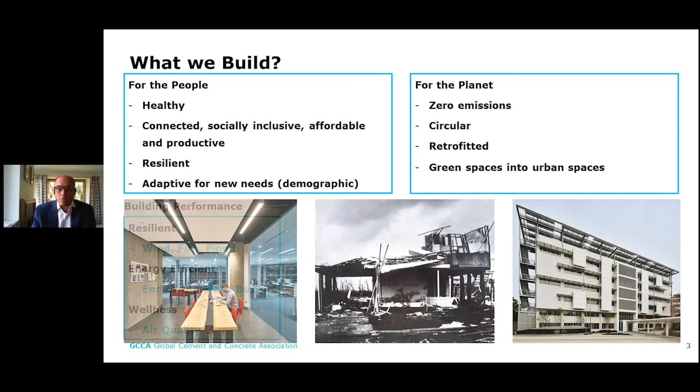So in terms of performance, what do we want our buildings to be able to do? It won't surprise you that on this list we have resilience almost up first - wind, fire, flood. We want them to be energy efficient, the end of the glass box. We know that construction through the last century and the beginning of this century, people like glass, but it heats up. Will we see the end of the glass box when it comes to architecture and wellness? A key part of wellness is the air quality of our cities.

We need to build in a way, both our buildings and our infrastructure, to respond to air quality. In terms of resilience, you can see in the middle an example - that was a cyclone in Australia, but obviously hurricanes in North America cause similar damage. We need to build against those.

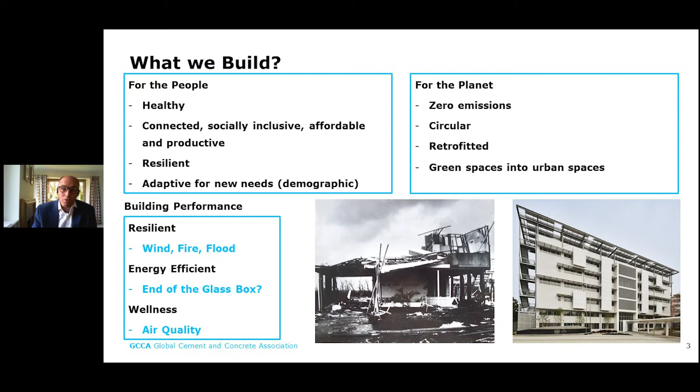And the disaster we had 3 years ago, the Grenfell Tower - this was a concrete frame building, and if it hadn't been concrete frame, it wouldn't have still stood after 24 hours of being completely burnt out. An absolute tragedy, which in a modern economy should not be allowed to happen. It has had serious ramifications in the UK construction sector, and I think it will be more broadly again. It's brought fire safety really to the forefront, in an area which had probably gotten complacent.

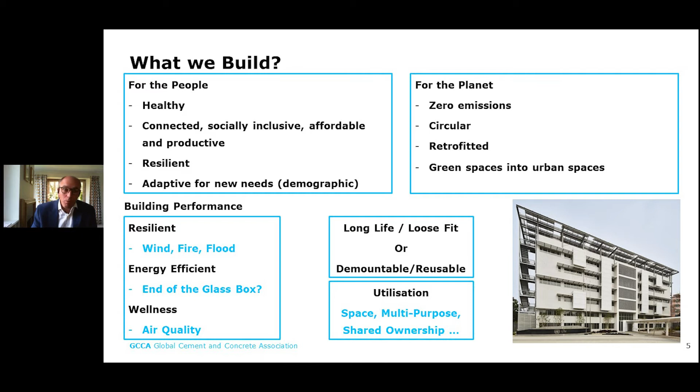So in the middle of the box, I've got some more here in terms of what we want from building performance: long life, loose fit. I'm a structural engineer, was with Arup for 10 years. The two choices: do you build buildings to last a long time, but be able to be flexible in their use? For example, the building on the right. So long life, loose fit, repurposing of structures is something we're very familiar with, probably in developed countries.

This example on the right-hand side is actually from Vietnam, the UN headquarters in Vietnam, which was a housing apartment block and was turned into their offices. An example of a concrete frame building, which because of the inherent resilience of it, can be repurposed.

The alternative to that would be demountable and reusable. If you've got a temporary stadium for an Olympics for 80,000, 100,000, maybe you want to reduce it down to 40,000. So you make parts of that demountable and reusable.

Great awareness currently in terms of the utilization of what we build. Are we using the space in the most appropriate way? Office space is being reevaluated post-COVID. The number of hours that the office is being used, even pre-COVID, was very small, and we need to consider how much we're going to be using that office space in the future and whether multi-purpose is an option.

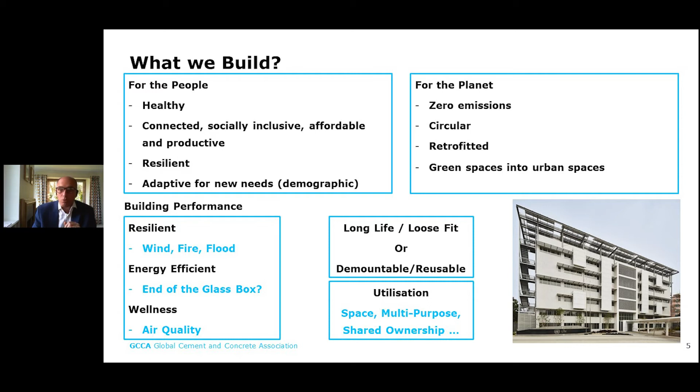Most of this has been about buildings, but we've also got, in our built environment and in our urban ecosystem, the infrastructure.

And will new transport change what our urban environment looks like? So much of it is determined by the car. Will that be how we plan our more sustainable built environment in the future?

We're going to have new energy sources, and therefore we've got the infrastructure around those new energy sources, and wellness again that I've already referred to. So what we build will be changing, and we need to consider what it is that we need as a society. How we build will also change. The first box here, the left-hand side, is new. The right-hand side, how we build, also needs to recognize the needs of the planet, those same four things.

How we build - productivity is a key thing for the construction sector. It's lagging behind in terms of productivity compared with other parts of the economy. Digitization is now coming in, but has been slow to be introduced into what is typically referred to - and I think it's true for most of the globe, you'll know better in your part of North America - a very fragmented industry that has scope for digitization to improve it, and business models to improve the productivity. And part of that, material efficiency.

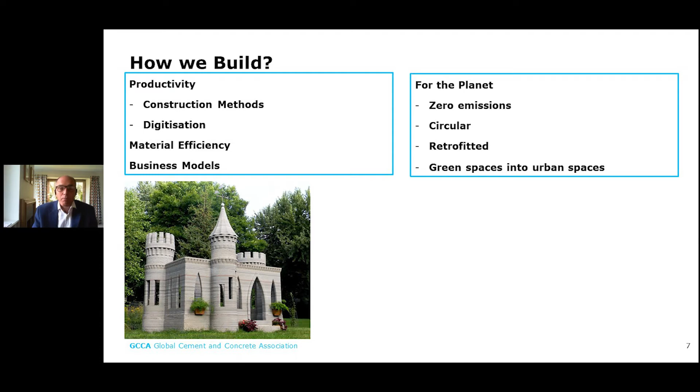So how are we going to build? 3D printing - it's just an example project on the left. No one's going to live in that, but 3D printing is coming in. Robots on construction sites laying concrete bricks, and off-site precast construction in a factory.

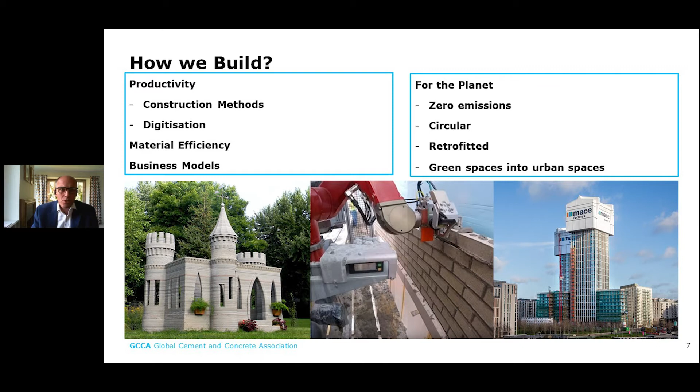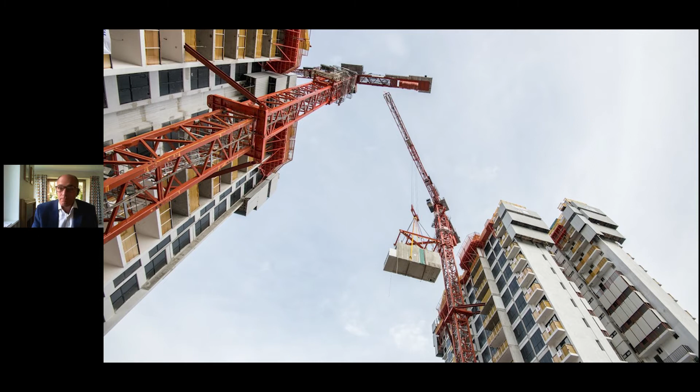So how we build is going to change, is changing. What are we going to build from? This report is from a little while ago, now, in 2017. Balfour Beatty, a major construction company in Europe, did a report on innovations to 2050. And what their crystal ball, what they saw, is the need for a new material which will work in harmony with the environment, have a lower carbon footprint, and is more durable, meaning less wastage. That's what we need for 2050, is that new material.

And it will address, for the planet, the same issues on the right-hand side. I would suggest that at the bottom there are 5 examples here, but there are more examples of what we need this material to be able to deliver. On the left-hand side we've got a sea defense, so it's coping - a material that can cope with aggressive environments. A material that's robust - the bottom left image, fire resistant.

And the images on the right, the first one is to do with acoustics. As we have a growing population globally, people need to live beside each other. Many of us are able to live in houses which are not in high density, but much of the world's population is living in very high density, and acoustic separation from neighbors is very important, as is thermal comfort on the far right-hand side. What will we build from?

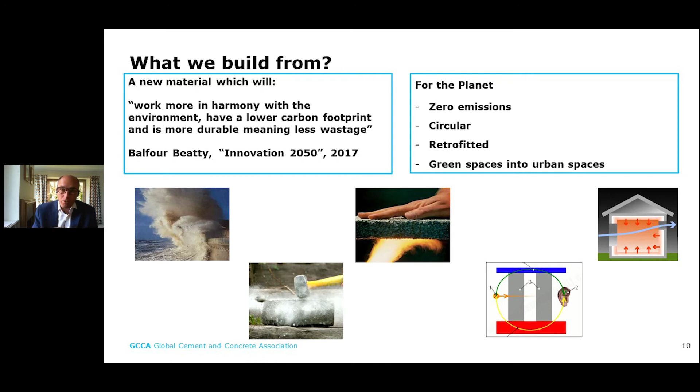We build from a material that can address a lot of these performance benefits, a material that needs to fit into the project life cycle and deliver the needs of those on the left-hand side who are designing, those who are building, those who are occupying in the first use of a project, the second use, and ideally can be recycled back to the beginning.

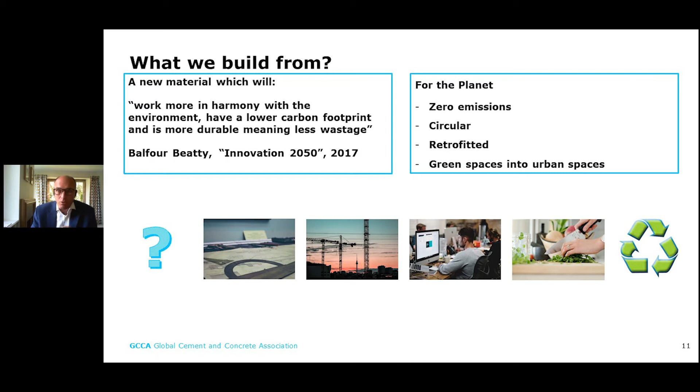So actually we live in a circular economy paradigm now. So let's put those things in a circular paradigm. And this new material, we want it to be supporting biodiversity, lowering the carbon footprint, zero waste, and delivering the needs as you go around this cycle.

So what do we want as a designer? As a structural engineer, I want a material that's got the properties I need, and it's got the product range. So the product range - concrete can come, materials can come in all sorts of ways, but we want a range of products that we can design with.

For the contractor in the construction, these are some of the parameters that might be useful. We've heard about 3D printing - can this material be used with 3D printing? Is it moldable? Can it be built in a modular way? Can it be used with other materials in a composite way? What is its performance? Can it then be demountable, adaptable, or long life loose fit? Is it fully reusable, this new material that we would wish to have?

In this circular paradigm, people often talk about circularity solving the issues. Globally, if we think about the metal sector, if 100% of metals are recycled, it will only satisfy 50% of society's demands for material. So we need additional material. We need to question where that additional material is coming from.

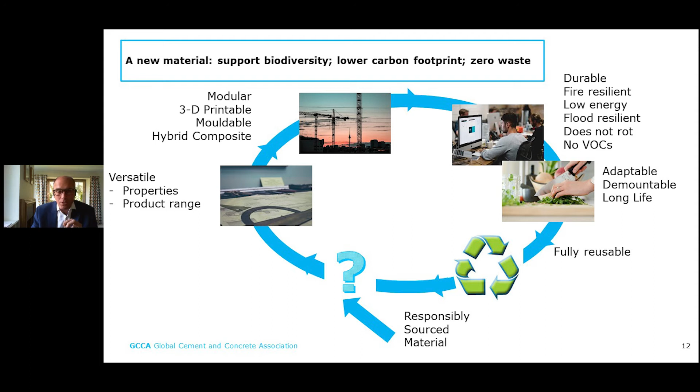I would suggest we want it to be responsibly sourced. What do I mean by that? It's going to have large reserves, because we need a lot of this to build what society needs as we try to deliver the UN Sustainable Development Goals, and serve society's needs in terms of resilience, for example, and housing.

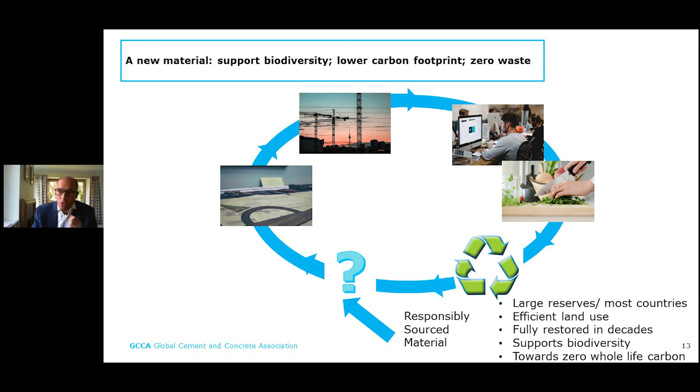It needs to be efficient in terms of land use because there are constraints on that. Once having used the land, full restoration is required. We need to support biodiversity in the process and afterwards, and we need it to contribute towards whole life carbon. These are all things we need for this new material, in addition to the recycled material we need to be using in circularity.

I would suggest, and ask you to consider, that concrete can satisfy this requirement for a new material. I think it satisfies the versatility required here in terms of properties and the range of products available. It can be a concrete block, a concrete bridge beam, a paving stone, poured on site as a linear, flat, or curved element. You can have infinite mix designs for different strengths and performance.

It meets the requirements so that contractors can deliver this in the most efficient way. It has these properties to give the performance, whether it's an office, retail, or accommodation. And it can be demountable or long life and adaptable, fully reusable.

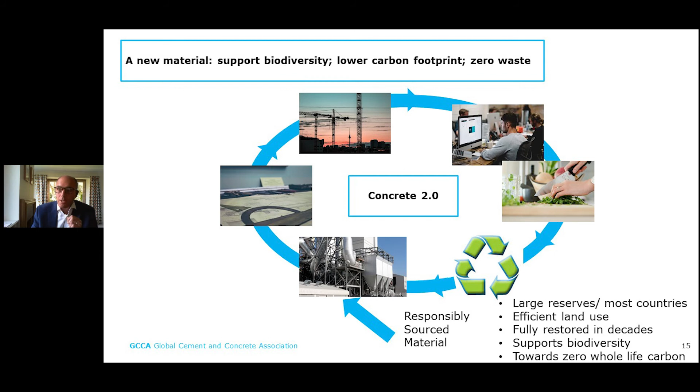It absorbs CO2 - that's a great story we have in terms of recarbonation. Speakers that follow me will rightly address the manufacture stage, where we do emit CO2, and we're doing a lot of work there. It was great to hear from the Vice President of PCA on the CCUS activity already underway. The cement manufacturing industry has already done a lot.

We use others' wastes, which is a very circular thing to be doing, and they've been doing that for decades. So it's very resource efficient. We can utilize renewable energy, and we've got new binders coming on stream and carbon capture that we've heard of. This happens to be an example from Europe.

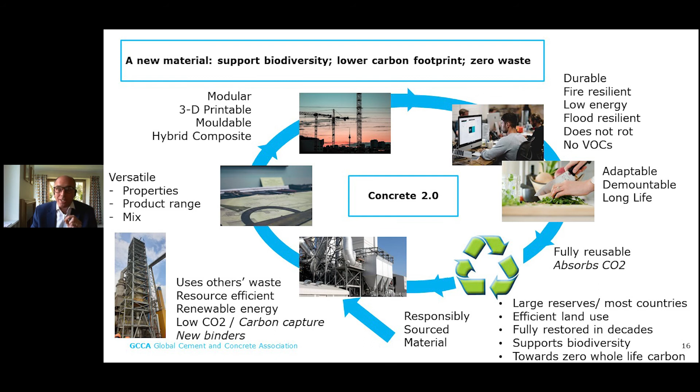In terms of CO2, the global producers came together and launched, in September last year, a climate ambition statement which pledges towards carbon neutral concrete. Part of that is developing a roadmap globally. So you can be assured this isn't just an issue being addressed in your part of the world - we've got members from all regions committed to carbon neutral concrete by 2050.

One of the things they're already doing is developing innovation platforms, so that globally we've pulled together a network of 40 academic institutions and 30 industrial partners. We have an Innovation Open Challenge targeting startup companies and particular technologies in order to accelerate implementation of those technologies. So they're all working towards the future.

But as for now, globally, we're measuring and reporting on CO2 emissions, and have for years, to enable benchmarking across the industry globally. We're sharing good practice and promoting knowledge sharing across the industry, so that good things currently being done can be done more broadly and widely. Many of the CO2 reductions we can achieve can be achieved with known technology now, and we need to accelerate those actions. Bill, thank you very much for inviting me.